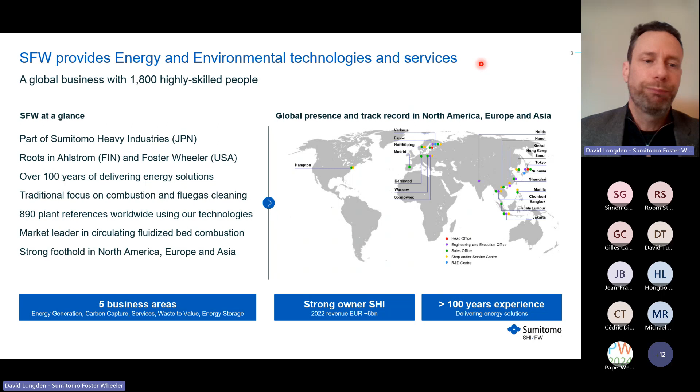So from the 1980s, SFW has a long history going back to this time, where we started essentially with our roots in supplying syngas from air gasification to lime kilns in the paper industry and power applications. We've delivered 11 gasifiers in total, 7 commercial plants, again for the heat and power sector, 2 very important demonstration projects, which I'll talk about, and 2 pilot plants as well.

And you can see the key ones here are with respect to the Sydkraft Biomass IGCC, where we delivered a pressurized gasifier, the Corenso gasifier, where we got experience in using oxygen within the circulating fluidized bed reactor, as well as the NSE biofuels demonstration as well.

So just to say a little bit about the technology, because we understand there's quite a lot of exciting technologies on the market, but we believe that direct oxy-steam circulating fluidized bed gasification technology is one of the most robust. And that really matters to get availability and hours of operation to make this more mainstream.

So our first reference from 1993, our Värnamo gasifier, the air-blown biomass integrated gasification combined cycle plant, built to realise its high net electrical efficiency, and this was successful in proving providing hot gas to a gas turbine. A very successful demonstration project with over 8,500 gasification hours, 3,600 using the gas turbine, tested on a variety of different fuels. And for us, it was most important for SFW to get this experience in pressurized gasification.

Because then we can inform our prospective customers with respect to some of the extra challenges associated with gasification at pressure as opposed to atmospheric. But unfortunately, this plant was mothballed in 2002 simply because it wasn't economically viable with the natural gas price.

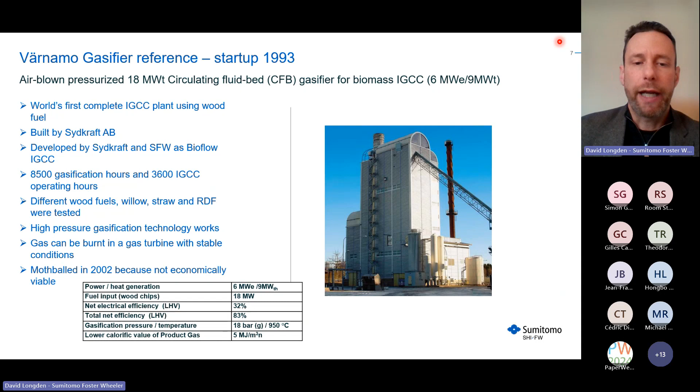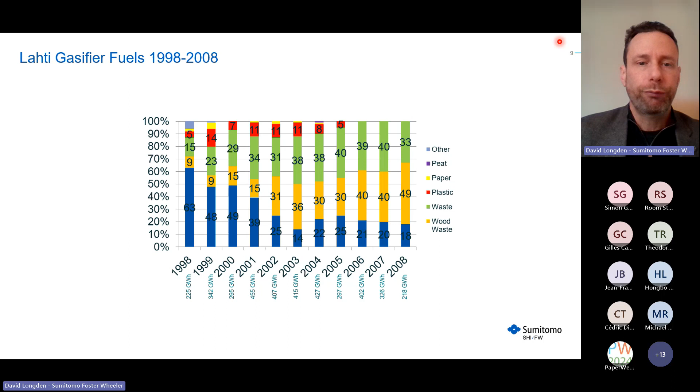Just a snap from the side for the Lahti gasifier. You can see the gasifier here, providing after the cyclone its low calorific value syngas through this duct to a specially designed low CV burner, which is then co-firing this flame. Interestingly, with very little colour in it, you can't see much colour at all, supplementing the other pulverised coal flames, and in this case was displacing up to about 15% of the overall fuel input.

But Lahti doesn't stop there, because in the Lahti Streams EU project that was run by VTT, there was also extensive know-how gained with filtering and reforming at this project as well.

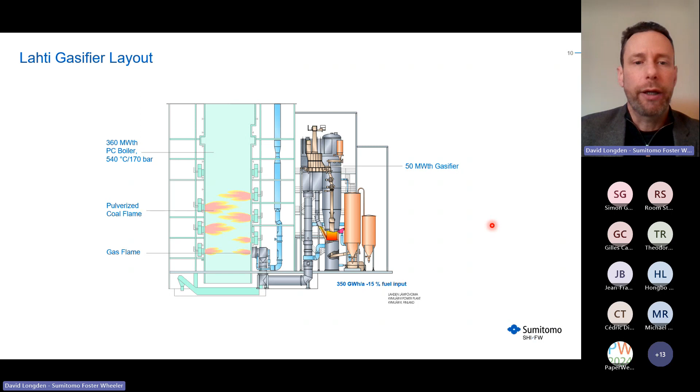So the jewel in the crown, where this all culminated in 2009, so still quite a long time ago, the NSE Biofuels project. This was a consortium of Neste and Stora Enso, I'm sure two companies that you've well heard of. We teamed up with VTT and themselves in order to develop this demonstration plant.

We provided the gasification and the syngas cleaning, whilst VTT provided the reformer know-how with respect to performing the shifts, etc., on the syngas. The ultra gas cleaning was provided by NSE in the form of Rectisol, as well as the smaller 100 kilowatt Fischer-Tropsch synthesis unit.

So just to go through this process, we delivered the scope that is delineated in the blue box. Essentially, we dried the wood chip to 15% moisture, and fed this to the gasifier operating at around 850 degrees.

Then cooled the syngas down to about 500 degrees, and put it through a barrier filter, where the alkali metals could condense, and the dust was taken out from the gas before reforming with the water gas shift and the catalytic converter, using a conventional scrubber to take out the chlorine, sulfur and ammonia to make it suitable for compression before sending it to the synthesis process.

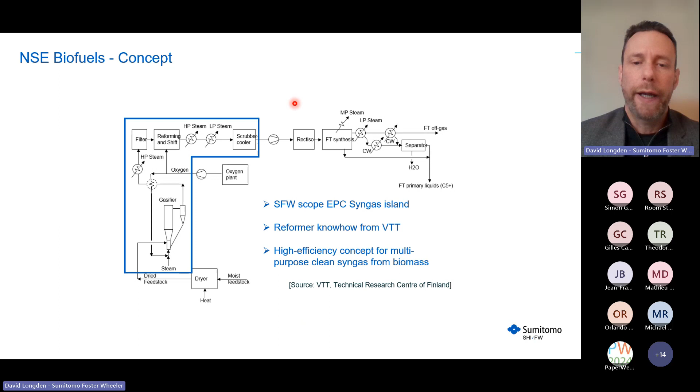Again, looking at the project, the 3D model from afar, we can see the gasifier here. There's the flare on top, feeding system, rotary valve feeders, syngas cooler, hot gas filters, and the reformer before the syngas going off to the ultra clean syngas cooling and the Fischer-Tropsch reactor.

And here's a couple of photographs to the right that gives you some idea of the fuels that we used.

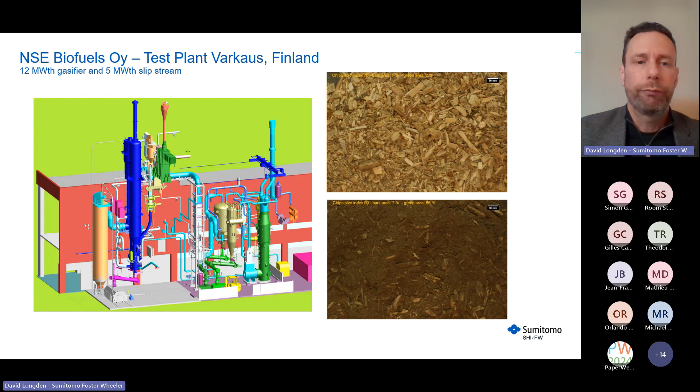So to share with you a little bit of the experience, the gasifier ran for a total of about 9,000 hours, and the 5 megawatt slipstream for the syngas cooling and filtering and reforming for about 5,500. The availability for the gasifier was well over 90% in both the 2 years of the demonstration.

We had some problems with the slipstream syngas cooling and cleaning in the first year, as you can see, but managed to get that availability to over 90% in 2011 in the second year. And I think the most important point about this is that we gave a provenness to the process of the complete cycle from wood-based biomass to the Fischer-Tropsch crude, which was very successfully demonstrated.

So where did this end up back in those days? I guess we culminated in making a design for a commercial plant coming on from the demo at 300 megawatt thermal for the Oxysteam plant.

But sadly, this didn't realise at the time due to its capex, and I think basically there was a lot of preference at the time for HEFA and first generation biofuels, and second generation had probably quite not got the focus on it at that point. And I think quite simply, you know, we were ahead of our time back in 2010.

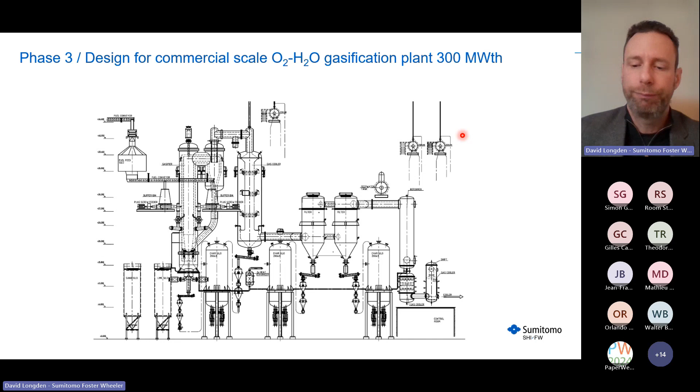So we leave the gasification market and we go then to concentrate on providing CFB combustion plants to Asia. But indeed, there's been a lot of action in other parts of the market.

And the UK was one of them, and I'll use the UK market as an example of where gasification has essentially not got to where it's needed to be or even wanted to be. This was a situation in which the government were offering a significantly high subsidy for gasification. Nobody really understood what gasification meant, I guess, in that sense, but nevertheless, there was a big subsidy for it, in addition to the wholesale power price.

But because there was actually a lobby so that cheaper and lower sophisticated or lower capex technology, they wanted to make sure that they could continue to enjoy this subsidy. So in order to keep everybody engaged and not to upset everybody, at the time it was refused in a 2016 consultation to actually add definitions of syngas cooling and filtering to maximise the maximum value from gasification, because at that time it was widely deemed that no one could actually do it.

But even for these more simplified power generation, almost like I think what they've called close coupled combustion plants, there was still some risk adversity, but a bit of an attitude that don't worry, the EPC contractor will actually wrap it and provide you the warranties and guarantees and liquidate damages behind that. But as we'll see shortly, that did actually just result in losses for the industry there.

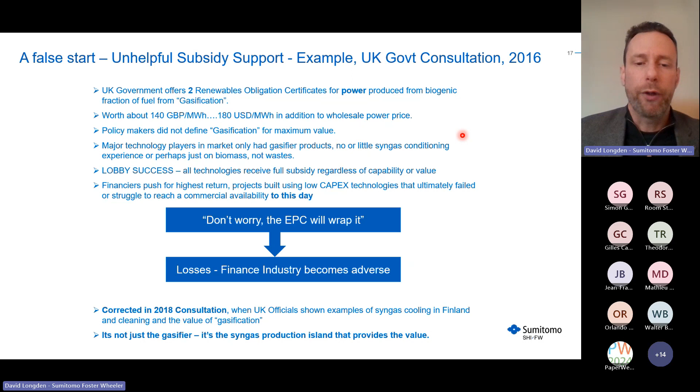This was corrected in 2018, where I took officials from the UK government to go and see what real gasification actually meant, with the cooling and cleaning and the true value of gasification, which is not to burn the gas, but to use its constituents for further processing, either to biofuels or chemicals, and to try and make that view that it's not just the gasifier itself, it's what you're doing with the gas, and therefore how you're making a syngas production island.

Some of the issues that were encountered: feeding systems that were not well designed, particularly if they were meant for biomass and not RDF, blocked bottom ash extraction systems, build-up of tar and dust in ductwork, and agglomerating beds where perhaps it was a BFB.

But there was also a huge amount of project delivery and EPC difficulties, where EPC companies were essentially very dependent on small gasification technology companies that seemed to have a habit of falling into bankruptcy at the time. Even with one project, this one here actually made a £70 million loss just with respect to its liquidated damages.

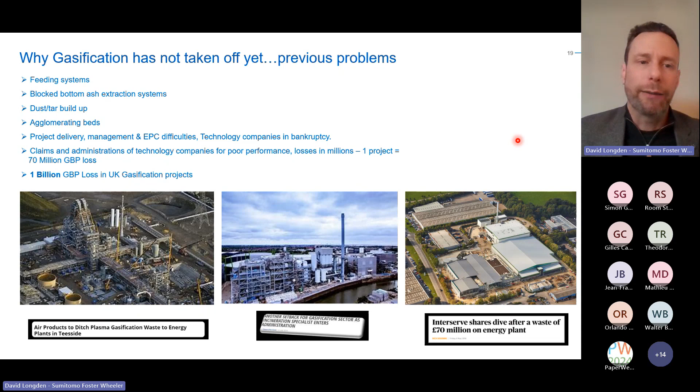But in terms of the whole UK market, a total of £1 billion was lost over these years. However, keeping the positivity, there was a great step forward when the government still acknowledged that gasification could really play its role in achieving net zero and a significant reduction in carbon dioxide emissions.

I wouldn't say it forgave all that, but it certainly was open-minded enough to commission a review from some well-leading consultants at Fichtner that only reviewed gasification using syngas cooling and filtering for biofuel production. Essentially the conclusions on a worldwide basis are that there are several technologies meeting TRL levels of 6 to 8, producing various end products suitable for deployment, and of course these are happening in the world.

So the pandemic comes, a chance for us all to breathe, work from home, get to know how to use Teams, etc. But it was useful in terms of providing that space to breathe perhaps, and for government and policy and decision makers to really understand the true value that gasification could bring.

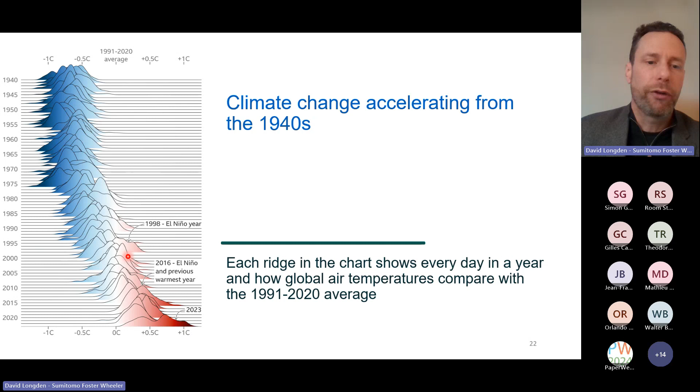And so the question has got to be, well, if value-added gasification isn't going to happen now when we most need it, when is it going to?

Especially when we look at these graphs, when we see that 2023, only just last year, showed some incredible phenomena with respect to increased temperatures, air and sea temperatures, shown in this red band that is above the previous daily records for the year.

And of course, we perhaps got far more perception and understanding of some of the freak weather events that are happening, and of course the heat waves and wildfires that happened across Canada and the US last year, which is of course taking away potential sources of feedstock in itself.

And I think at the moment, even Chile, there's always somewhere in the world that seems to be suffering from greater magnitude and frequencies of environmental disaster.

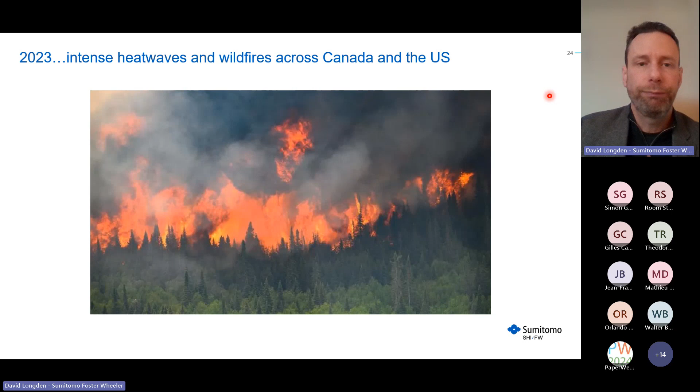But thank goodness the world is responding and has decided that biofuels are to play its part, and of course gasification can also provide a key part of that delivery.

So in the next few slides, I'll focus on the aviation and the maritime sectors with respect to how things are moving forward there.

So we've got increasing regulatory support for sustainable aviation fuel, or SAF. Countries are stepping up, saying that the SAF mandate, 10% of blending, must be done by SAF by 2030, including Canada, the UK and Japan.

You can clearly see that we're starting to leave that power generation behind. We see in the US a very exciting market with the Inflation Reduction Act, supporting SAF production with tax credits, as well as a nice big funding pot of 4.3 billion in order to move SAF projects forward. And of course, we're delighted to be working with our colleagues in Japan and the Japanese government in pushing the technology there, as well as in Europe and the North Americas.

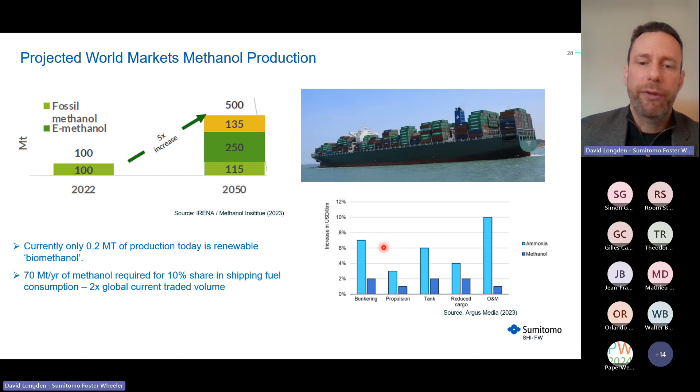But you can see why the shipping industry has preferred methanol over ammonia when you look at how much cheaper methanol is to convert to than ammonia itself, with 9% less O&M costs and 5% less bunkering costs, being able to use that existing infrastructure.

So Maersk is incredibly active across the globe, seemingly signing up MOUs with project developers to take off their methanol from their biorefineries when they build them. Methanol is seen as perceived lower technical and economic risk. It's got more diverse end uses, so it's less vulnerable with respect to its bankability. The oil and gas companies particularly like it because you can use existing fossil fuel infrastructure available for transport and storage, and of course it can be upgraded to SAF or gasoline.

And we're seeing now an increasing number of ships being ordered, 35 ships ordered just in 2022, but we expect the number of ships to keep increasing up to 2028 and beyond.

So policy and now regulation, looking just for an example from the EU for a moment, we've got the RefuelEU initiatives for aviation and shipping, where essentially emissions are being cut to 55% of the average from 2020 by 2030. We can see how aircraft fuel suppliers are obliged to increase their blend, really significantly from the low value of, say, around 2% today, all the way to 70% up to 2050.

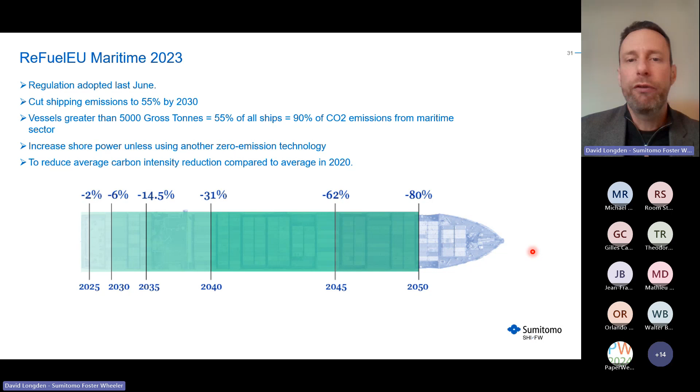So the point is that these regulations are now providing a level playing field, which was absent back in 2016, I think worldwide, but certainly in the context of the UK market, which we discussed before, which led to a huge amount of chaos and confusion and that billion pound loss in that sense.

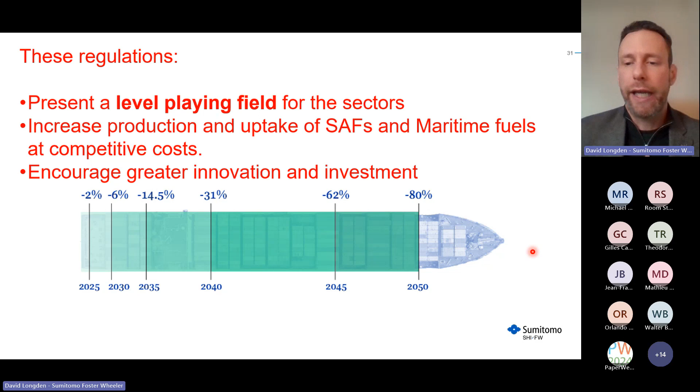So this is great news for the industry. It's going to encourage production and the uptake of fuels and drive competitiveness, as well as encouraging the innovation and the investment to do that. And here at SFW, this is clearly where we are placing our efforts.

So let's celebrate some of these achievements that have been happening from 2020. We saw in June 2021 the JAL flight, Japan Airlines, fly from Tokyo to Sapporo using a SAF blend, 50% at that time, using SAF from the Fischer-Tropsch synthesis technology at the Nagoya Gasification plant, using woody biomass.

Enerkem has been leading the way and has never really detracted from the focus on biofuels, progressing very well from their Westbury demonstration plant to the Edmonton plant. We saw only just last week that at 15,000 hours of operation they're going to retire that plant now, but they got the certification for converting waste to biomethanol and indeed to bioethanol as well.

And I think what I'm particularly excited about is Enerkem's project to be coupled with a 90 megawatt proton exchange membrane electrolyzer, for reasons we'll discuss later, near you guys, just in Varennes. I'm very sad not to be with you closer to home there.

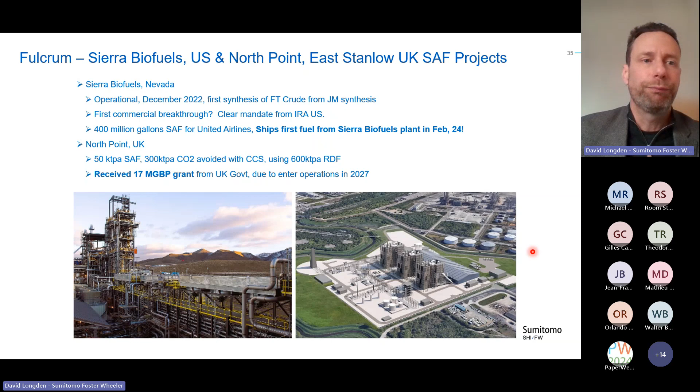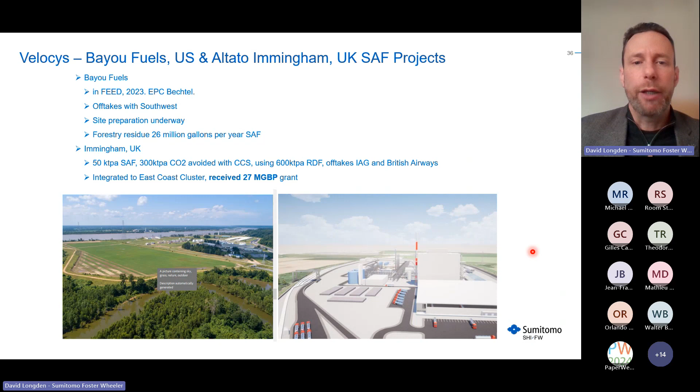Velocys, another well-known synthesis company for quite some time now, is in FEED, fully supported by their EPC partner Bechtel, with offtake from Southwest Airlines, preparing their site. In Immingham, UK, in the industrial heartlands of our northeast, they're also preparing a biorefinery based on refuse-derived fuel, supported by British Airways. This is also to be integrated into our East Coast cluster of carbon capture, where you can sequester the CO2 under the sea, and they have received a £27 million grant into the project.

Just in November 2023, it doesn't seem that Christmas was that long ago, Virgin Atlantic was successful in flying the world's first 100% SAF commercial flight from London Heathrow to New York. Wow, it is actually believable - we can fly in a sustainable way and not feel guilty about it. This was around 88% SAF from HEFA and 12% from synthetic kerosene. Nevertheless, it shows that in order to make this happen, we need to use all the different technologies that can work on all the different feedstocks.

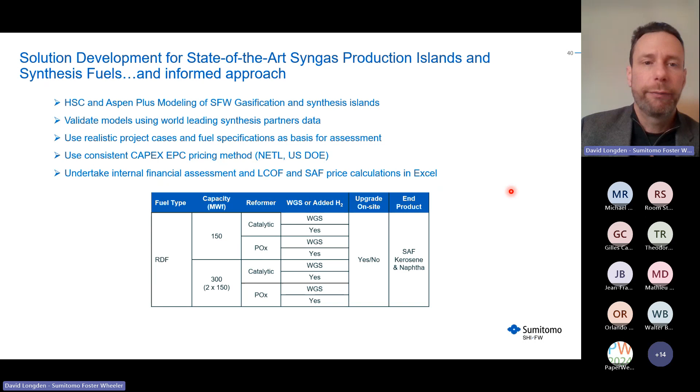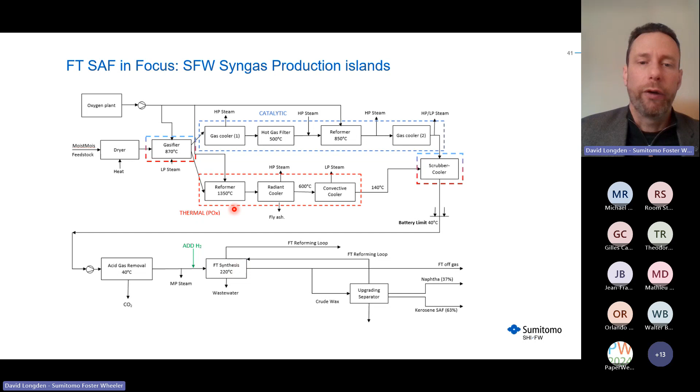Here's the PFDs to show it. The catalytic process is very much as what we successfully demonstrated at the NSE Biofuels demonstration project. And here we have the thermal partial oxidation reforming route, where essentially the reformer itself operates at over 1,300 degrees with an auxiliary fuel and oxygen. The oxygen required for that is around 25% of what would be required for the whole biorefinery, but the auxiliary fuel would most preferably come from tail gas from the synthesis unit, or indeed natural gas.

Looking more at the reformers we've been considering: the catalytic reformer uses zirconium and nickel-based catalysts and uses the injection of steam and oxygen to produce its resultant syngas, whilst the POX reactor is much more sensitive to particle load distribution, requiring adequate mixing of the syngas with the hot oxygen burner flame. The catalytic reformer gets more water gas shift, resulting in around 16% more hydrogen in the syngas compared to the POX. But the POX is very good at reforming methane, which increases the carbon monoxide amount in the gas. So in the absence of any supplementary hydrogen, the catalytic reformer has advantages over the POX, but the POX might have advantage over the catalytic where other forms of hydrogen were available.

But of course, this is not the full story, as we'll see later.

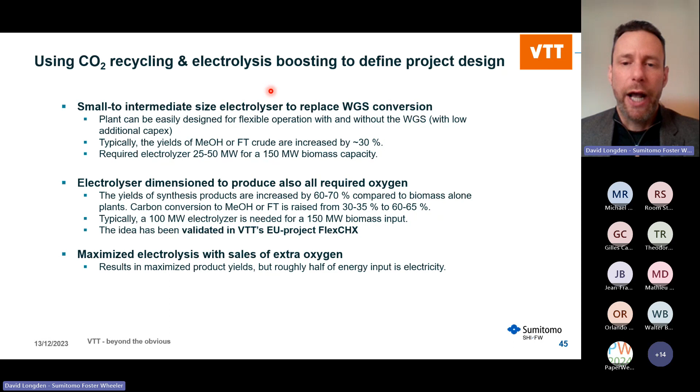It's almost on the point of these plants becoming e-fuel plants at this point, where roughly half of the amount of energy input is actually coming from electricity.

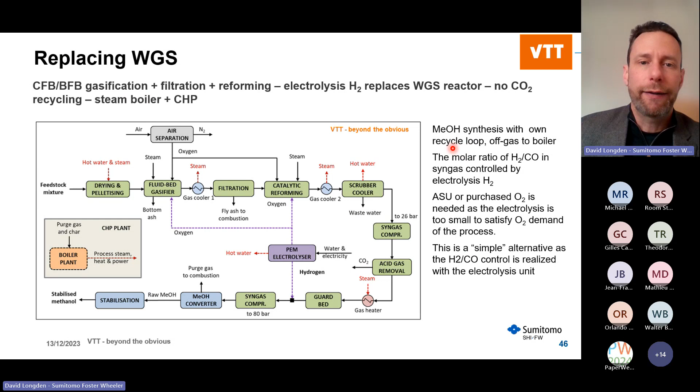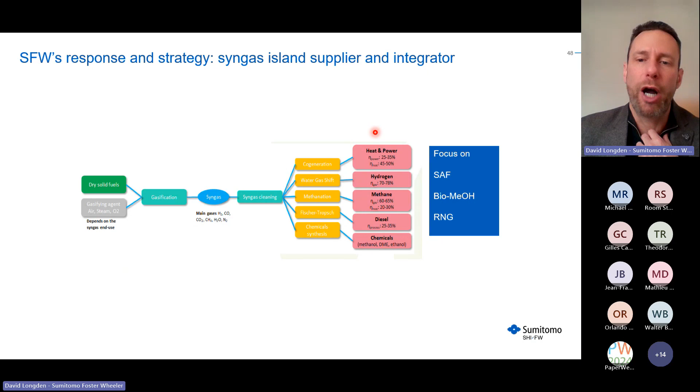So in terms of how we're responding to all this, this is a typical gasification to biofuel pathway. We will focus at SFW on SAF, biomethanol and RNG. We are a provider of syngas islands and the integrator of the components within that island, working very closely with third-party technologies for the reforming in order to get the best syngas compositions we can.

Pre-treatment is something which we'd leave to others. There are some very good companies out there that do the necessary pre-processing preparation for fluidized bed technology. BMH, for example, is a company that has provided their technology in front of many fluidized beds in Finland with our combustion plants, and they are also providing to Enerkem for the Varennes plant.

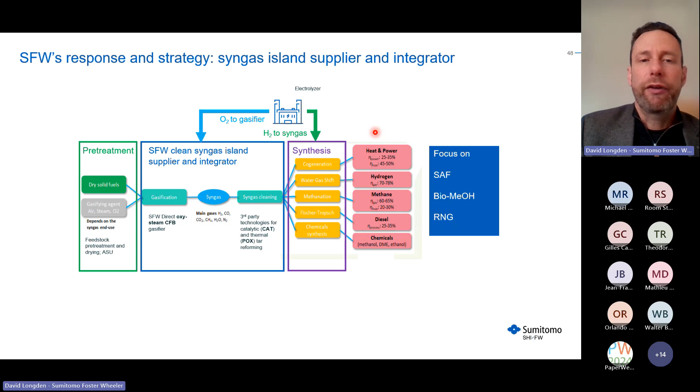Synthesis, of course, we work with our partners on, as discussed earlier. We're certainly very serious about integrating electrolyzers with our offering, as well as this CO2 recycling. But essentially it will still be down to EPC contractors to provide the full scope of the plant to owners and financiers, etc., with the warranties and guarantees behind that.

So, in the final part of my presentation to you today, where are we now and heading to?

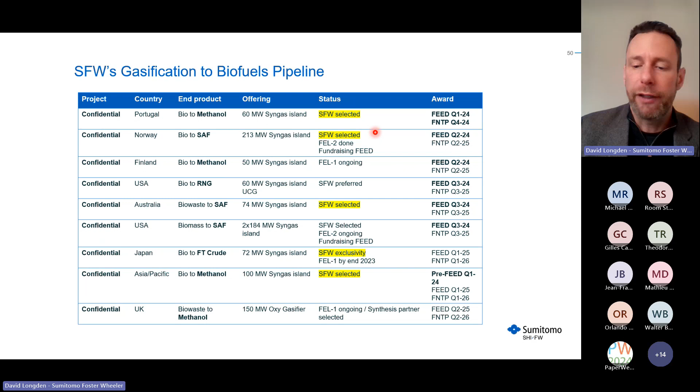So our present focus is bankability. People are asking us very serious questions with respect to the track record needed to give others comfort in order to finance these and really make these projects happen. With respect to that, we focus on our expertise to guarantee syngas composition, availability and reliability of plant and technology, in the scope I explained before.

For items outside our scope, we collaborate with our technology partners to manage the technology risk. There's the question of what first-of-a-kind guarantees actually mean, as well as EPCM or an EPC route - what is the best way of making these happen? It does depend on who the end project owner would be and their own degree of in-house expertise. We realize we need to work at scale to get the economics required for sensible business cases, to enable the sector to move beyond venture capital to more conventional project finance sources of capital.

So concluding, why is the time now? I really do believe we've got a level of awareness of climate change never seen before. Also the need for energy security - the amount of conflict going on in the world has never been at such a level since World War II, which is playing its part, with governments providing the policies to create a level playing field for value-added gasification for synthesis fuels production, for those difficult-to-decarbonise industries such as maritime and aviation, which so desperately need that.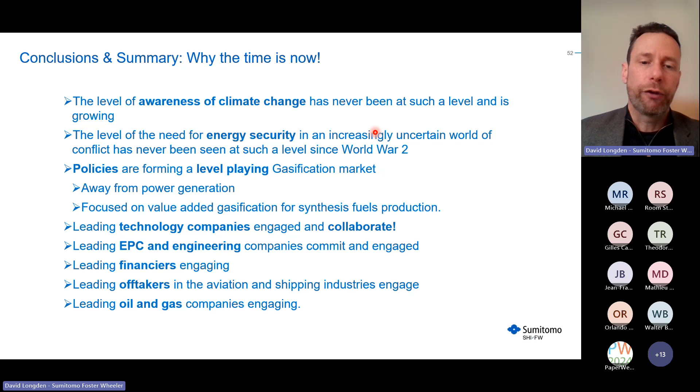And of course we're seeing the oil and gas companies, the fossil fuel companies, really engaging with us - it's great to see them with their ideas of how to use existing infrastructure to play their part in making this happen. Everyone is focusing to make this happen now. And finally, I was just wondering, do you feel that now is the time?

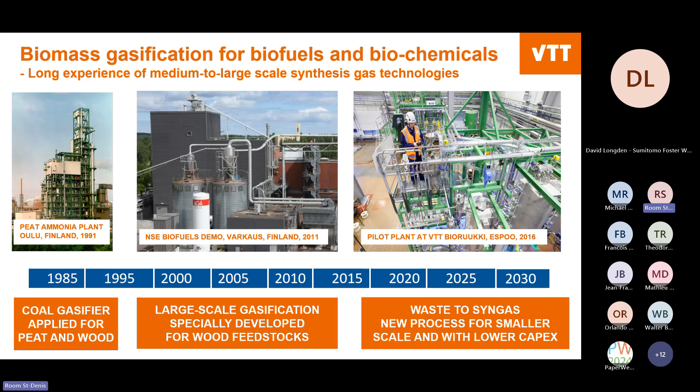So what we have mainly focused on is this type of process where we have this robust CFB or BFB, fluidized bed gasifier, steam and oxygen blown. It's quite simple from structure and really robust for what comes to feedstock basis. After the gasification, there is a lot of solids still, even though the carbon conversion in the process is really high, 98% or even higher. But of course there is then ashes and bed materials.

So the filtration is then the second step. We get all the particulates out from the gas, which then eases out the processing of the gas afterwards. Then we get like heavy metals, alkali metals, most part of chlorine already taken out at the filtration step.

Then the reforming technology is really like the key of these innovations. There the tars or the heavier hydrocarbons which are present in the gas are then decomposed, and then the yield for the synthesis gas is maximized. And what was already shown in David's presentation, the hydrogen to CO ratio is quite favorable already after the reformer, and we can already adjust the ratio in that step, which gives a benefit over some other technologies. But still, the gas is not clean enough for utilizing at the Fischer-Tropsch or methanol synthesis.

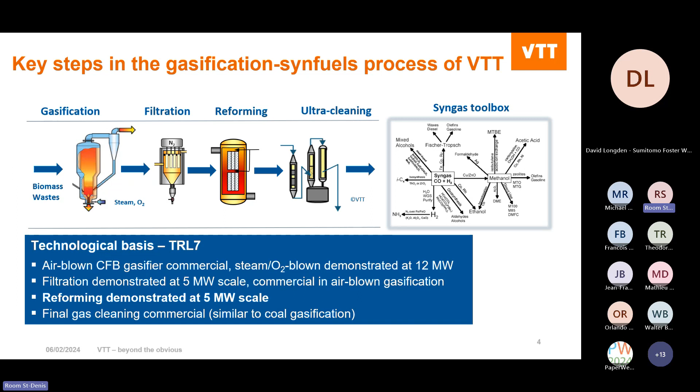About the reformer technology - it's quite simple in that sense that we have catalyst beds where we insert some oxygen to raise the temperature and bring energy for the reactions. We have active catalysts there, mainly the choices are zirconium, noble metal, or nickel-based catalyst. Nickel-based catalysts are now favored because of their reasonable price tag, and they are commercially available from many suppliers.

This technology has been developed at our own pilots for several thousands of hours, and then it has been demonstrated at that NSE Biofuels demonstration.

How we then cooperate - we are a non-profit research institute, so we are licensing the technology. We are not delivering anything. We cooperate with technology companies, for example Sumitomo Foster Wheeler, but that's the way how we are in that game. We are not here to deliver anything.

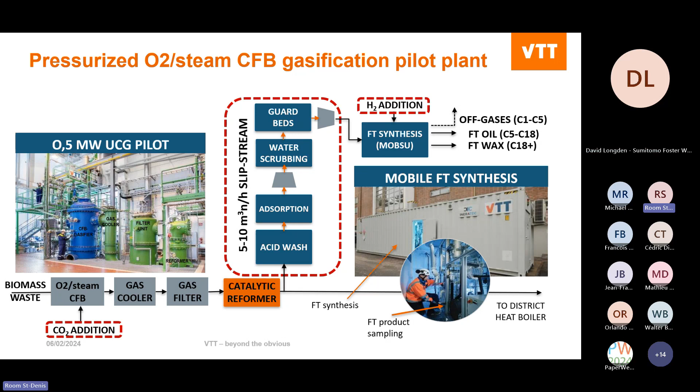We have the whole chain. We also have the synthesis there, Fischer-Tropsch synthesis, where we can produce batches of Fischer-Tropsch products for further studies, doing also showcases, because sometimes you have to convince some not-so-technical persons. For engineers, this is something everything we can do, but for someone it might be more about seeing that there is really that product which they are looking for.

The NSE Biofuels project was so nicely presented already by David, but we were involved in that as a research partner, and that's our role also. We develop the technologies to that TRL5 level so we can pilot them at our environment, but then we support the industry to successfully bring these technologies into real commercial scale.

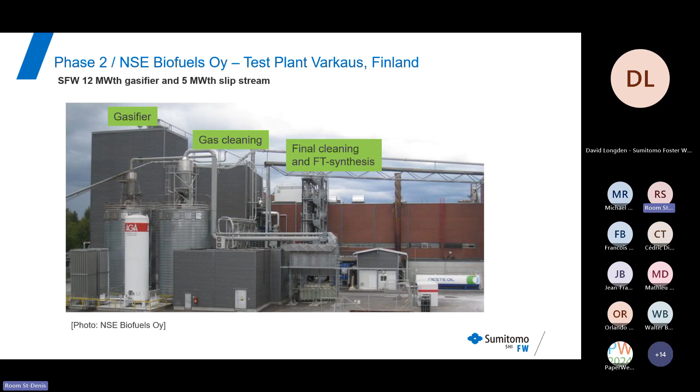It's worth remembering that this was already some years back, this demonstration, but it showed that steam and oxygen blown gasification for biomasses has been proven - 9,000 hours of operation, smooth operation. It can be discussed in more detail with Sumitomo. Also the slipstream with filtering, with reforming, that's also something which is proven. And it's quite costly to make these kinds of demonstrations, so it's not wise to start doing the same thing now 10 years later, but to build on this.

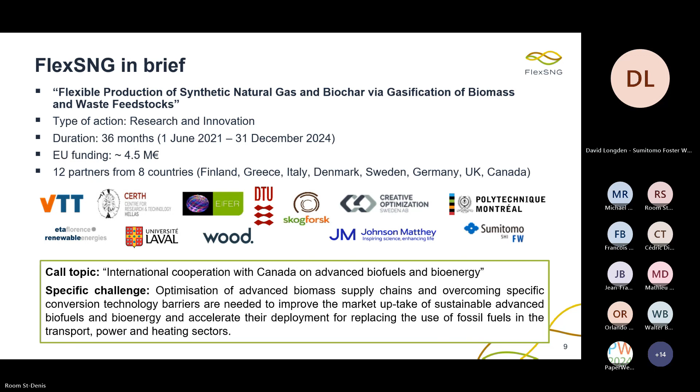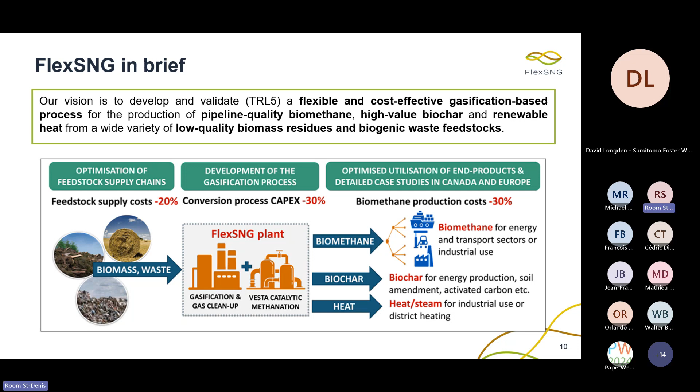So what we are then developing - basically we focus on getting the CapEx lower from the process. We optimize the feedstock supply chain, and we decrease the production cost of biomethane by these means. And basically how it is done - this is like a typical setup of gasification to methane production.

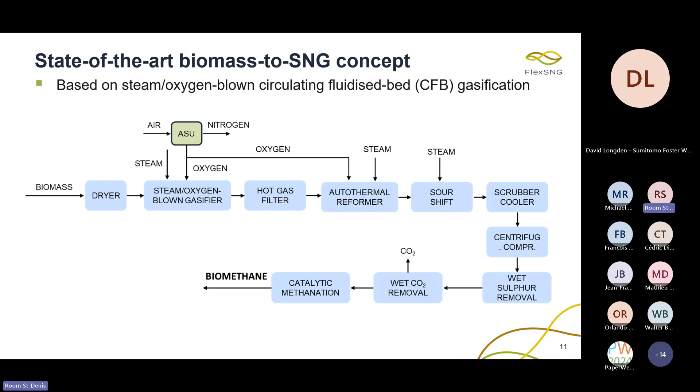One innovation we are bringing in is how to produce the oxygen, not through air separation units, but with oxygen membrane technology, which is estimated to bring about -10% of the capex. It's pretty capex intensive, the oxygen production.

Then we can eliminate the water gas shift. There are two things - the reformer is something where we can adjust it already, and then the Wood methanation technology we have is really more flexible than the competitors.

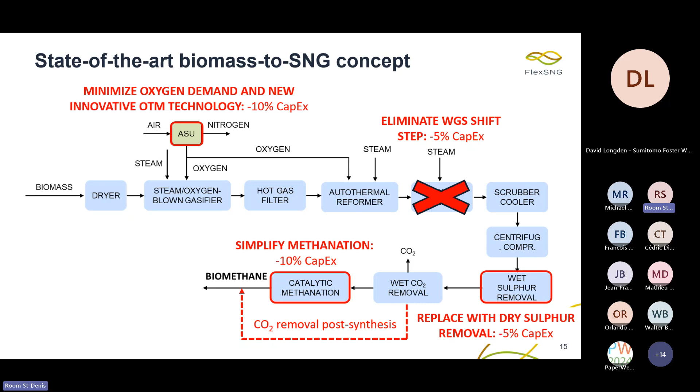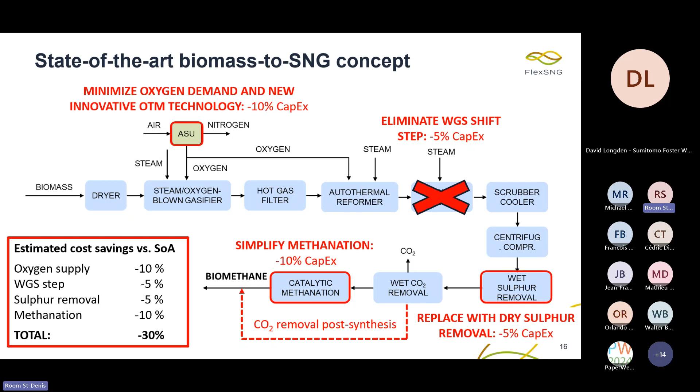We replaced basically the rectisol technology with dry sulfur removal based on zinc or activated carbon processes, and then the Wood methanation, which Wood has in their portfolio, is a simpler and really efficient process, which also makes it possible to remove CO2 after the synthesis. So we gain quite much benefit from that, and that brings it to about a 30% capex decrease, where we focus. We have then made tests for that.

Another thing we have is these two operational modes. In this project, we are focusing not only to maximize the yield of SNG, but also to produce biochar, and that's really the research focus in this project. We're looking at how to utilize fluidized gasification in such a way that we can also produce biochar in certain circumstances, if it seems feasible. It can then be a carbon sink, or it can be used in construction, so it could bring some benefits in the future.

It's basically done so that the process itself is the same, the gasifier itself is the same, but we just run it a bit differently, so that we get a lower carbon efficiency, or in a way carbon conversion in the gasifier, and then we recover the biochar which is produced.

Or then what is the typical case nowadays, to maximize the production of the synthetic natural gas or RNG, where we target a 70% conversion on energy basis. I think we are now quite near to that target, but it will be calculated and estimated more carefully.

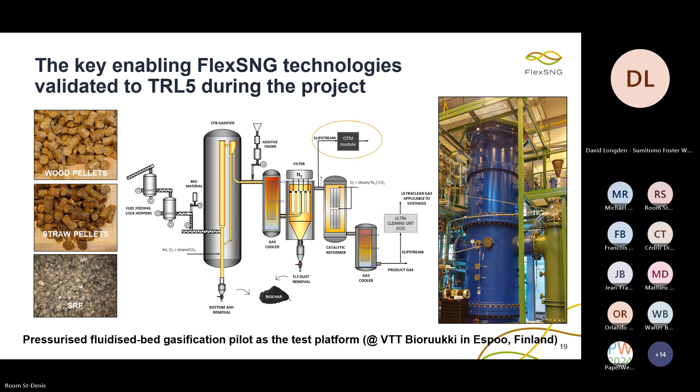We have quite extensive infrastructure at VTT, so basically we are utilizing this for this project, but also for many other projects. That's how we can help industry, being really effective, because we already have the infrastructure. We can be an outsourced research partner who does the tests, and you get the results really fast. You don't need to invest in your own infrastructure.

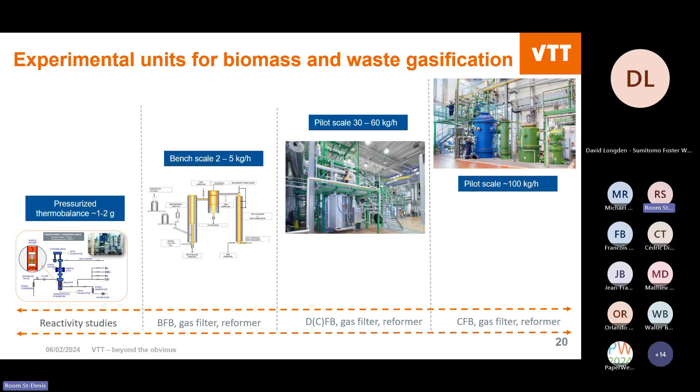I think they sort of have a religion of not going beyond TRL 5 or 6 or somewhere around that, and then working closely and seeing the commercial implications, one technology at a time. It's really impressive, two of the VTT facilities just outside Helsinki.

Checking for questions online. Yeah, I think we might have a question here. Please, I don't want to be the only one asking questions. A very simple one: does your process allow you to separate the ash from the char, or does it come together?

Well, basically part of the ash comes together with the biomass from the gasifier. In the bottom of the gasifier, we collect really a minor part of the char. So basically we get part there, but of course quite much of the ash is actually bound into this biochar, and that restricts where it can be used. And VTT has actually done a great job researching that topic. Good question, thanks.

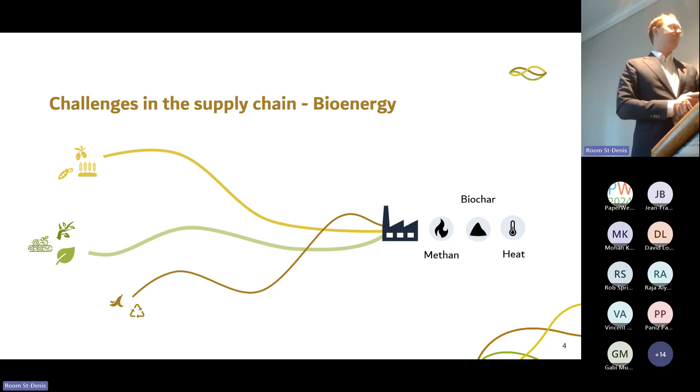Looking at the challenges in the supply chain, we have these three streams. What we really want to do is produce either biomethane, biochar, or heat. So we have three value chains and three products that we can co-produce. Looking at the challenges, it's quite different across the value chain overall.

For agriculture, we have seasonal availability — a very limited window where we can actually harvest agri-waste. We have variation in properties since we have quite a lot of different types of agri-waste in the system. We also have different modes of transportation, price efficiency, and of course a very important factor: the moisture level.

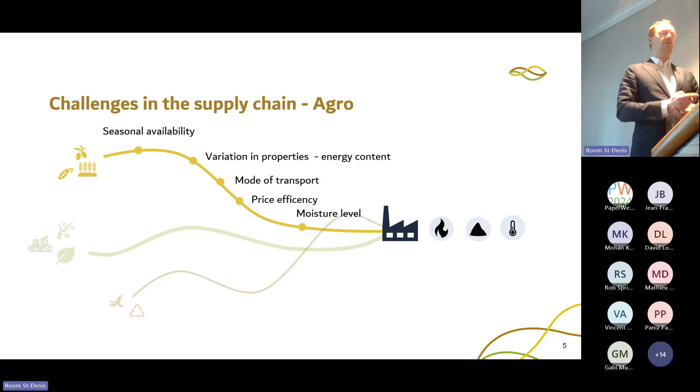For the forest residue part, we have the question of when do we process? Now we have the challenge that we have forest residues, but we need to break that into chips. So where do we do it? At the harvesting site, at a terminal, or at the end product facility? We also have to take into account transporting either the chips or the forest residue, and we have different transportation modes to consider.

Of course, we have different quality here because we have different kinds of trees. There's also the aspect of resource allocation, since equipment needs to move around, and we have different capacity limitations for actually doing the chipping to get the right feedstock for the process. Same as agriculture, we have a price-efficient range where we're cost effective with the feedstock. And then there's inventory utilization, because we're very intensive during perhaps winter and summer when we can harvest a lot, but it's more difficult transitioning from one season to another, with equipment limitations going into the forestry sites producing this logging residue.

Then we have municipal solid waste — it's the same question here: when do we process it? Do we process it at bioeconomy or biomass centers, or at larger terminals, or at the end product facility? Where do we actually gather that, and what is the availability?

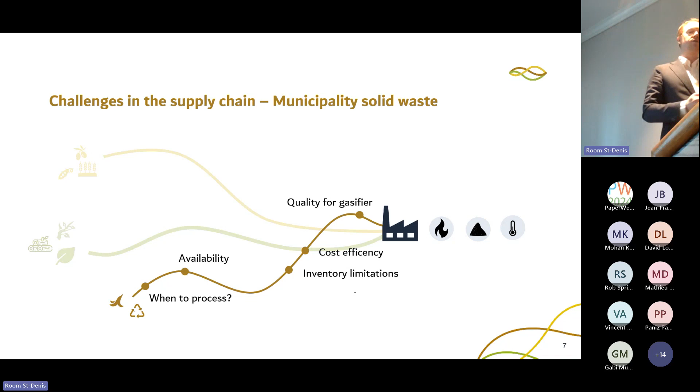Another challenge in this value chain is the supply chain: we have to decide what to produce, handling different campaigns and seeing what kind of recipe we want to use. Now that we can co-handle different feedstock, we can use different properties, combining forest residue with agricultural waste, which means we need to define what recipes to use and when.

There's also the question of capacity - how much we can have, how much inventory, how much we can gather, and utilizing this resource over time, as well as the drying process. What soil moisture content do we want? Do we want a process to dry it, or keep it drier from the start with more inventory over time? And of course, the yield of the feedstock, the seasonal variation, and the price, cost and competitiveness, because we have to stay competitive in gathering this supply chain and feedstock to provide that efficiency.

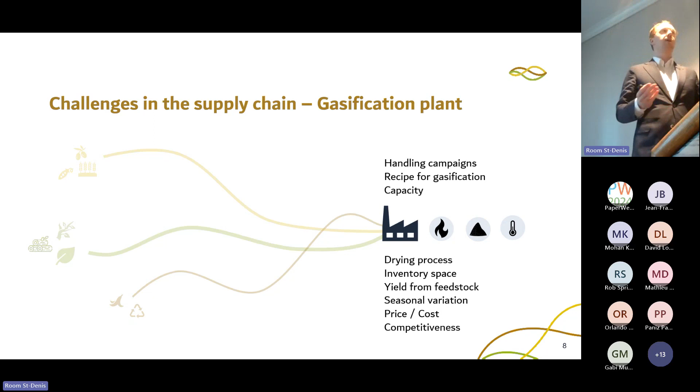In the FlexSNG project, which is quite unique, we developed a process to follow quality and soil moisture levels over time. We can look at different soil moisture levels for the feedstock over time - when do we want to go pick it up, what process do we associate with dropping that soil moisture level, and also take into account the inventory - where do we want to store it?

Another part is looking at transportation modes, the processes and feedstock handling - where do we want to ship, and what transportation mode do we want to use, truck or train? We can combine this within the optimization model as well.

Another part is looking at the campaigns - how do we want to produce, taking into account feedstock price, feedstock soil moisture, and the inventory cost of these different materials. Agriculture waste has a small window, but forest residue has a large window, so do we want to store forest residue while gathering agriculture, or store agriculture for when forest residue becomes more expensive during fall or winter? Co-handling capacity in this joint value chain has also been key in the FlexSNG project.

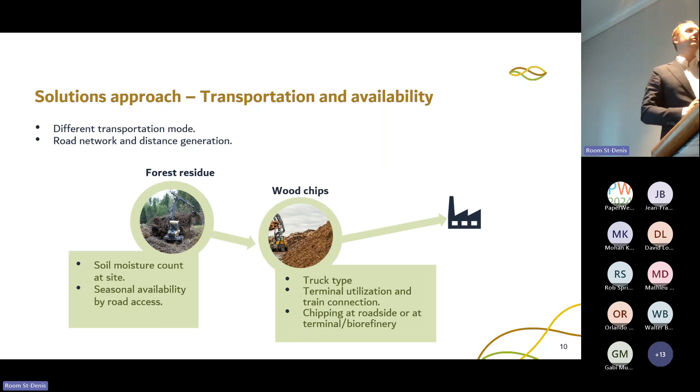To address this challenge with trucking and train, we included a way of dynamically creating the road network for all the case studies, whether in Sweden, Canada, Crete in Greece, or even New Zealand. This lets us utilize the real transportation costs and real distances for traveling by truck.

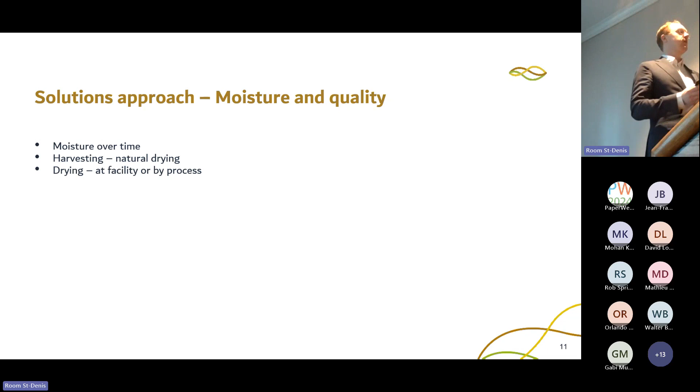As I mentioned, there's the moisture and quality over time to consider. If you have a pile lying by the road, it would have a different soil moisture count by the season, as well as another moisture count once you've done the harvesting, and drying to reduce soil moisture for the upcoming period and production.

So what we've done is made a methodology. This is for a monthly period, but we can also have it on a daily or weekly level. We can see the soil moisture count if we would leave it in roadside storage, so now we have availability to see the soil moisture if it's lying there, and it's been lying there for quite a while.

And of course, what we included as well is the way of doing a drying process, where we can do drying either at a terminal or at the production facility.

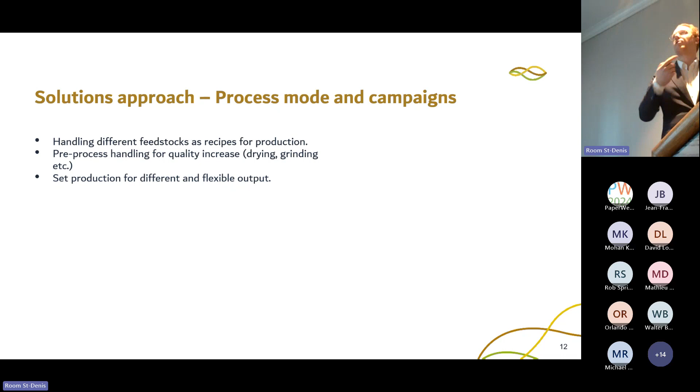Looking at the process mode and campaigns, that's how we handle different feedstocks with the recipes, looking at the production. It's also about the pre-process handling, like the quality increase I mentioned before, drying, grinding, etc., and also being able to produce this flexible output that Ilkka nicely explained, mode 1 and mode 2. What do we want to produce and what kind of recipe do we want to utilize?

So looking at that, in the model we can take this into account. We can take the pre-treatment and the production, but now have different kinds of recipes. These are examples, there are many more and percentages within this, but we can have forest, forest agri, or forest agri and wood waste, depending on the production and what you want to use as a recipe for the quality, ash content, etc.

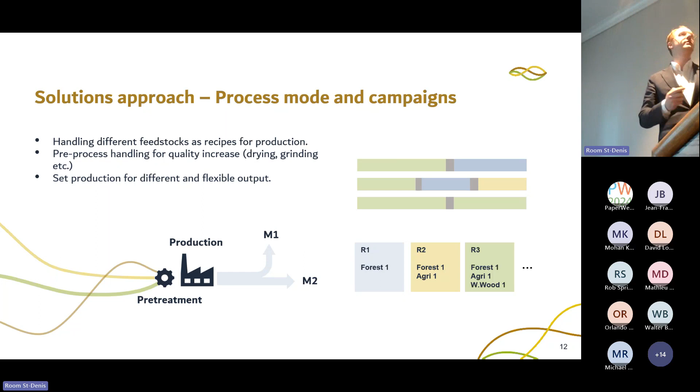What we can really do with the model is create these campaigns: when should you use what material, associated with what you want to produce. And also looking at what would be the transportation cost for your product, what would be the inventory cost of keeping the product. So we can make examples and do scenarios depending on what is the most valued attribute and what brings the most value.

Now that we have that complete model of the value chain, we can look at the scenario analysis part of it. What kind of location do we want? What is the feedstock availability in the nearby neighborhood? What kind of transportation mode do we have access to? And what kind of processing and pre-treatment facilities are available? Of course, competitiveness becomes a big important part of this.

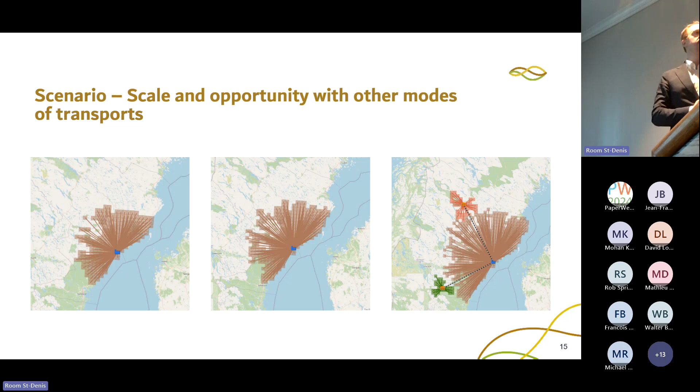The last one is sort of the competitive advantage, and that's when looking at a picture like this. Yeah, this is very good, very nice. It's by itself, it has a lot of availability, but the reality is that we have competitors as well. Other people want to buy this product, so we have to take that into account.

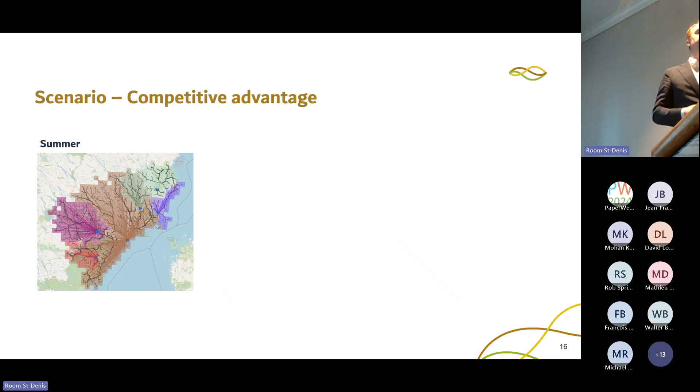So we can create scenarios looking at, well, during a low season, this could be the potential where we can actually be profitable because the other competitors, which is the bioenergy plant creating heat, are not very interested in the product during summer. But as that increases during winter, we can see that they're paying much more than us for the winter period. That means we have to go further, making it perhaps less profitable.

So we can make an analysis on that, looking at whether utilizing train with the same kind of volume could make us more profitable because we can compare it to the competitors in the surrounding area. We don't have to compete with them in close proximity in this kind of area.

So to summarize, what we've done in the FlexSNG project is develop a tool that can really evaluate the different aspects of the supply chain, looking at the key aspects of having that flexible and integrated value chain and investing in big biomass projects.

We can also include the aspects of looking at the end-to-end value chain and feedstock to deliver the product, because we can have the pricing and the availability and size of the feedstock. And we can also co-handle these different kinds of feedstocks as well, including quality and moisture level of the feedstock.

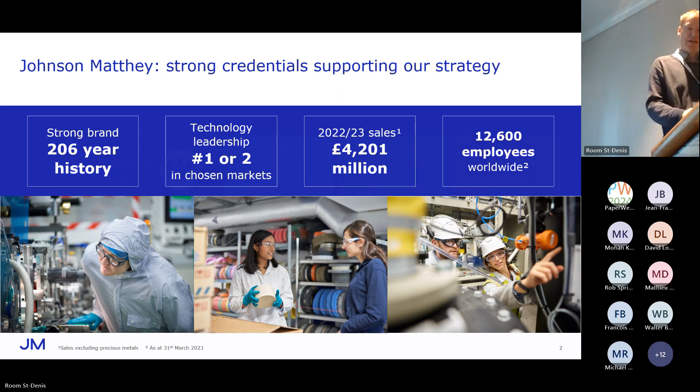If I go into a bit more detail, we have got 4 main areas. We're business to business generally, so you may not have heard of all our technology, but if you own a car, we invented the technology for the catalytic converter. So 1 in 3 cars contains our technology. And we also do a lot of work on particle filters for heavy duty diesels, big trucks, emission controls for static things. The area I'm going to talk most about today is our catalyst technologies.

This is to do with the syngas, which I'll tell you more about, but things like edible oils, hydrogen generation, ammonia, methanol, these type of areas. Our third pillar is hydrogen technologies. We've been doing fuel cells for a long time in the UK. And more recently, based on that, we've started doing electrolyzer technology, which is almost the reverse of fuel cells. And we see that as a huge future area.

Underpinning all this is our precious metals - metals like platinum, iridium, palladium. We're one of the largest refiners of these, and the technology that goes into most of these technologies. So we work a lot with our customers and partners, and we share the technology capabilities.

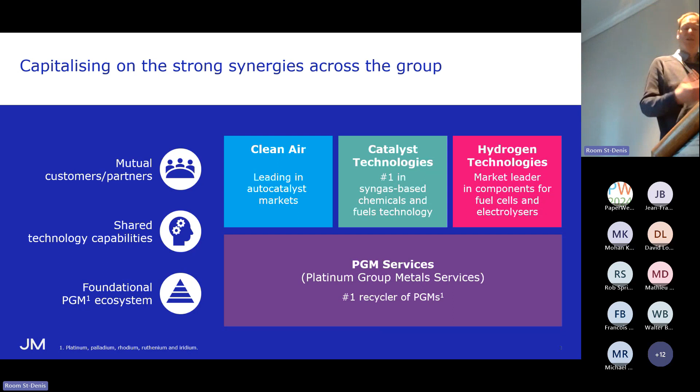As we heard earlier on today, and we're all aware of, the climate is changing, and all of us are affected by that. There's a lot of resource scarcity and also energy insecurity. So our number 1 priority is to lead the transition to net zero and to protect the people and planet. I won't dwell too much on that, but it's a very important message, and I think we all appreciate that.

And how we're going to do this is we're a global leader in sustainable technologies, and we work with a lot of the main energy companies, chemical companies, and automotive companies, and they depend on us to help provide catalysts and processes to help them decarbonize the system, to reduce the harmful emissions and ultimately achieve their sustainability goals.

So the chemical industry is very carbon intensive, and 96% of all the manufactured products rely on chemicals. This is foods, dyes, all the things around us require chemicals. And this demand is expected to grow by 25% by 2030. So we've got to do some more to do this. Ultimately, the chemical industry is one of the biggest producers of carbon dioxide, which is bad for the environment. And approximately 18% of the emissions come from this sector. So we're doing our bit to reduce these down.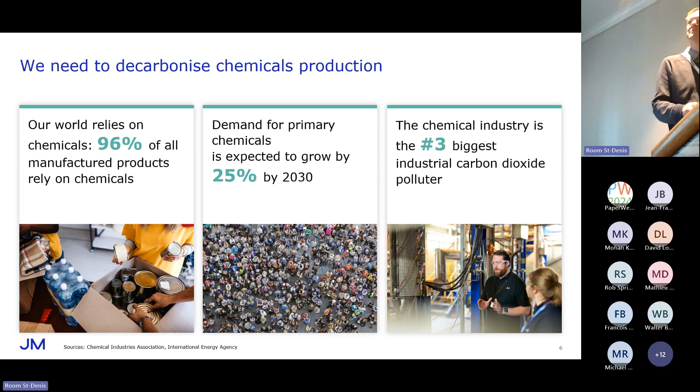So where is that going to come from? If we assume that we're going to reduce our dependency on fossil fuels, as everybody hoped, there's a maximum of 20% that really can come from bio-based. There's a limit to how much you can harvest biomass. And also, some of it gets used for food.

So that's obviously not going to be acceptable. So the limit is about 20%. So this then gives us - what do we do?

25% is predicted to come from carbon dioxide, and that's direct air capture or using CO2 from waste streams, industrial processes, and then you can capture that. But obviously for hydrocarbons, you need carbon and hydrogen. So to use that CO2, we need to get some hydrogen.

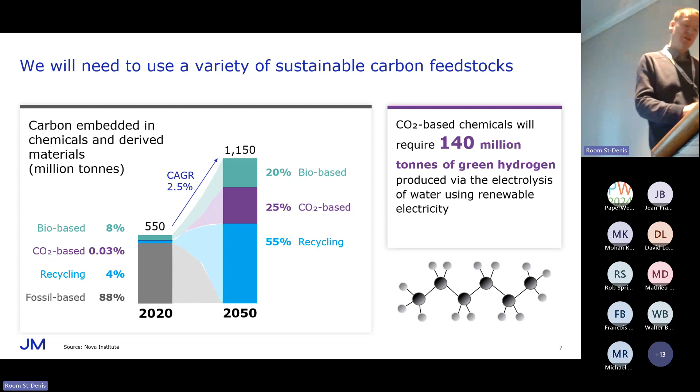So the next two slides are going to talk about syngas, which is the main focus of this talk.

Currently, fossil fuels are the main source of this. Traditionally, you can take things like coal, natural gas, oil - things we're all familiar with - and put them through a process. Generally, steam reforming is the main process where we convert them. That's energy intensive, and it produces hydrogen, a mixture of hydrogen, carbon dioxide, and carbon monoxide, which then can be used to produce all these value-added chemicals, which are so critical for our lifestyles.

A lot of these are industrial and consumer applications. So we've got paints, polymers, woods, fertilizers, and then we've got transport fuels. These are sort of the traditional transport fuels - they're not going through a syngas route. This is just purely fuels for cars, trains, buses, and planes.

So if we step forward, this is what the future could look like. We become less heavily dependent on fossil fuels, coals and natural gas, and we become reliant on more sustainable feedstocks. We've talked a lot today about biomass, wastes. We're also adding into this capturing the CO2 and then renewable energy.

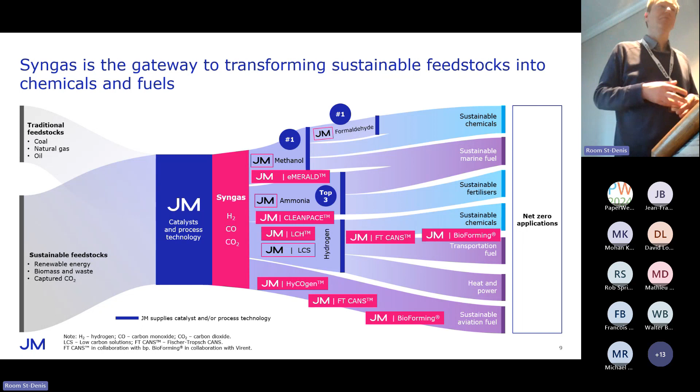And if we use Johnson Matthey's technology and expertise in engineering and flow sheet coupled with syngas, then we can go through to many of these processes. I'm going to tell you about some of these processes today, but they've all handily got names.

To get through to sustainable aviation fuel, we can use the process of HyCOgen and FT CANS. And also we've got another process there called eMERALD, which brings us through to methanol. I'll tell you a bit more about these processes in a minute.

Obviously, it's not the whole process because you can also produce things by non-syngas routes. So an example is the bioforming process - earlier on we heard about the plane that went across the Atlantic, the Virgin Atlantic flight. That was made by a non-thermochemical route.

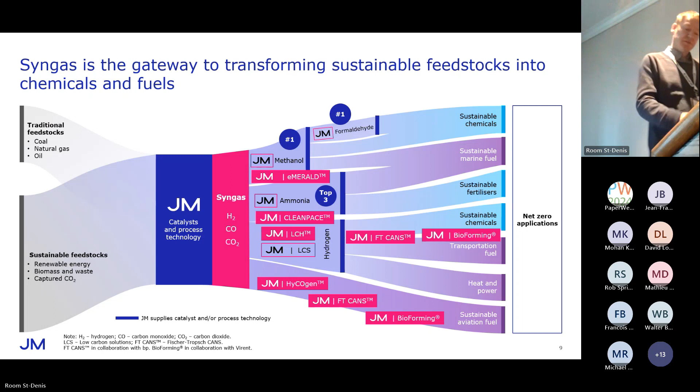So as I mentioned, Johnson Matthey is a catalyst company, which I'm involved in, and we're also an engineering company. So by putting these two things together, we can help our customers optimize their processes.

So as I promised, some of the details here. Currently, a lot of these processes involve the water gas shift reaction - this is an equilibrium reaction. If you look on the right-hand side of the equation, if you put water and carbon monoxide there, you can create carbon dioxide.

Normally you want to produce more hydrogen and carbon monoxide, so by tailoring these ratios, you can optimize what you want. In this case, we are taking captured CO2 and adding hydrogen to it, and that is producing more carbon monoxide. With that, you can tailor the ratio of CO to hydrogen, which is what you need to tailor your Fischer-Tropsch reaction to get the right proportion of the right chain length of carbons.

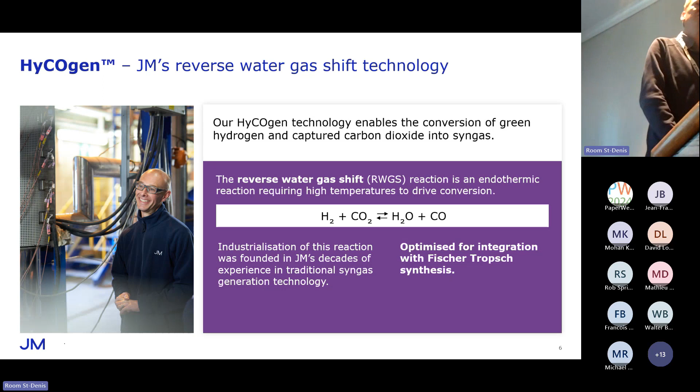So the water gas shift reaction is quite easy. The reverse water gas shift is much harder, and it must be done at a very high temperature, and there are lots of challenges with that. But over the years, Johnson Matthey's been involved in lots of these engineering solutions, and we've now got a process which does that. To give you an example, this process has to happen at maybe 1200 degrees.

And then in the reactor, you're going to have a lot of reactions with the stainless steel tube. You get corrosion, you get metal dusting, and you're adding oxygen in there. So there's a lot of problems in the process, and it's very challenging for the catalyst, but we've now got a system for that.

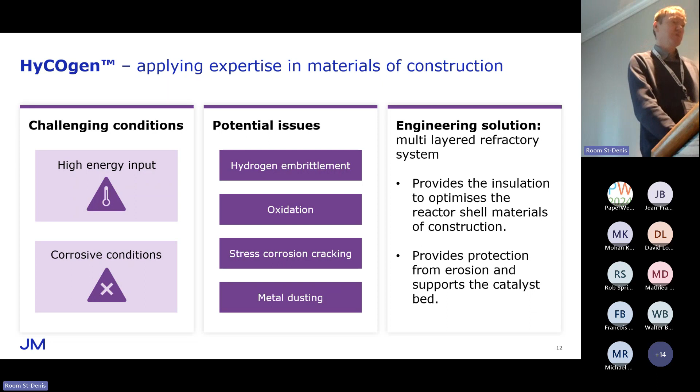So the FT cans is a development we've made with BP, the oil company, and this allows us to transform the syngas into hydrocarbon fuels.

The innovation here is the reactor design, and I'll show you that in a minute. This is a step change technology—by taking the carbon monoxide and the hydrogen, you can build up a chain, and this is a predictable route. You can build up certain chains. One key thing is keeping the temperature very controlled, otherwise you get different variations of reactions. This also reduces costs, increases productivity, and lets you start adding HyCOgen to help tailor the process. I'll show you more of that in a minute.

So this is what the can looks like. Imagine these cans are not much bigger than a Coca-Cola can. The gas—hydrogen and CO—comes in at the top, the blue lines. Then you get radial flow across where the catalyst is, and the gas goes down the outside of the can and is cooled. That's the key bit—you can control the temperature, because you really want very tight control. You want just a few degrees, which keeps the transfer very well and keeps control of it, since it's an exothermic reaction.

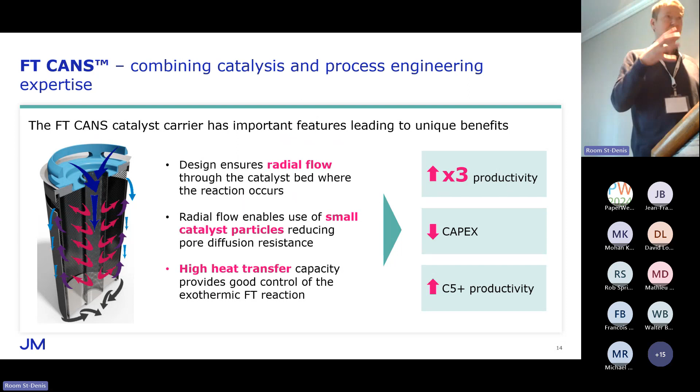So then you can get a 3x increase in productivity. You decrease your capex because these are small reactors, and you also get much higher productivity of the C5, which is the length of the chain you want, because you can manage to control that process.

This is an example of a license we've signed recently. Repsol in Spain and Saudi Aramco have a process for sustainable aviation fuel. They capture carbon dioxide from their plant and add renewable hydrogen created by wind. They use our HyCOgen technology to convert the CO2 into syngas, and then use the CANS reactor to make the synthetic crude. From that, you produce significant sustainable aviation fuel. Currently the plant in Bilbao is producing 2,100 tons of this a year—a good success story.

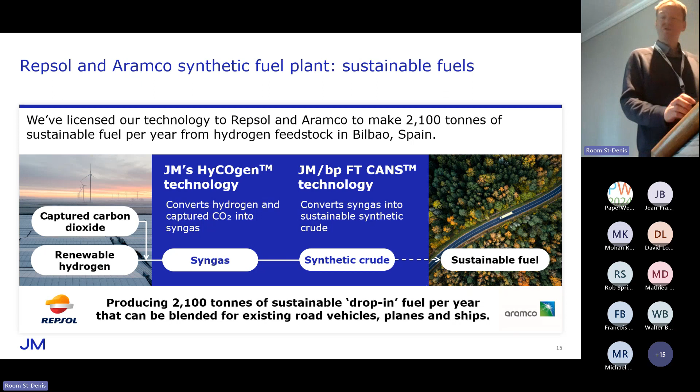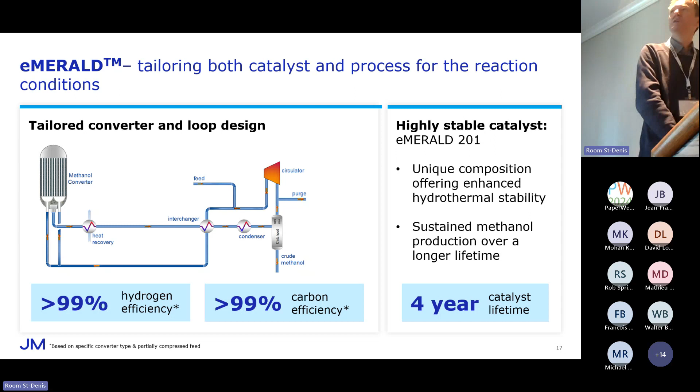This has proved to be a technology where we can also generate very high carbon efficiencies. There's a recycle loop here that helps control the temperature—in all these processes, temperature is the key thing, you need to keep it controlled. As I said, it's quite a hard, challenging environment, and all these new applications seem fairly challenging for the catalyst, but we've now managed to get a 4-year lifetime, which is acceptable—it's good.

An example of where this technology has been applied: the HIF Global Sustainable Aviation Fuel process, also with Honeywell. HIF Global are the leaders doing an engineering study on this. They've got recycled carbon dioxide and renewable hydrogen, which they put into the reactor to produce methanol, and then they use Honeywell's technology to produce the SAF fuel—another route to SAF. As we heard earlier, we're going to need different ways of doing this. No one solution will be the winner, but there will be a mixture of them, and this is a good one.

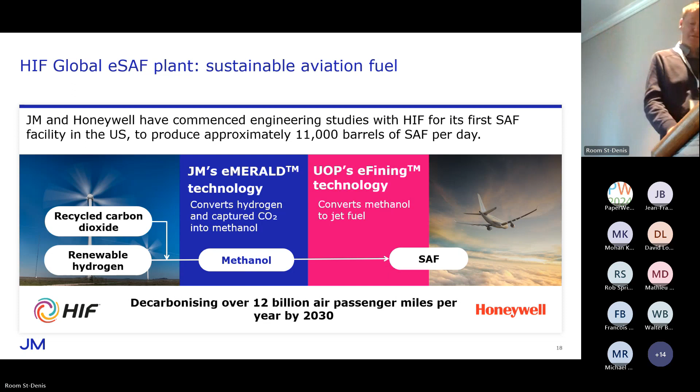So I've shown you some examples of commercial things—those are all near term. Going further forward, we need research as well. As a company, we team up with other research organizations and universities to leverage skills that we don't have and that other universities and companies do. I'll give you an example of two of them. We have the Prosperity Partnership, funded by the British government and sponsored by BP, with Cardiff and Manchester.

And this is another example of converting carbon dioxide, waste, and biomass into sustainable aviation and other sustainable fuels. The next one is called Flue2Chem, led by Unilever, with Procter & Gamble and lots of companies working together. I think this is the key point - none of these things can be done in isolation, you need lots of companies doing this. In this case, they're transforming waste carbon dioxide into surfactants, long chain value-added chemicals. This seems to be the thing - being able to take carbon dioxide and turn it into something of value.

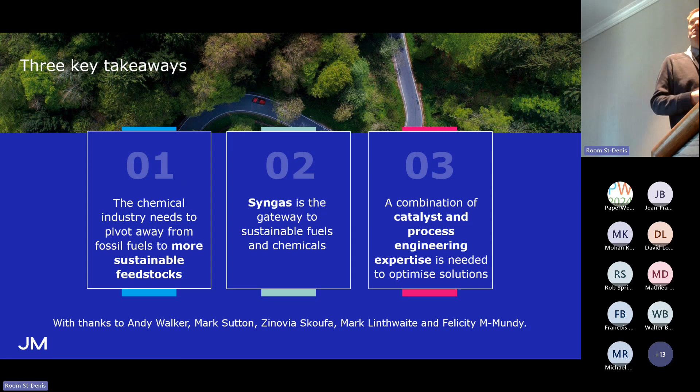So my three take-home messages from this talk are: the chemical industry needs to pivot away from fossil fuels and use more sustainable feedstock. Within FlexSNG, we've been looking at biomass, and increasingly we're looking at using waste because they're much cheaper, but that creates challenges for the catalyst. We talked about the tars and the sulfurs - we've either got to create catalysts which can cope with that, or we've got to have purification trains. But obviously this is all going to add cost. Ultimately, it's the way we have to go, so we have to develop these catalysts.

I've shown that syngas is a great gateway to sustainable chemicals and feedstocks. Obviously, we need to make more of them because the challenges are large. Once these first-of-a-kind plants are demonstrated, then we can produce more and they'll become very popular. It's a combination of catalyst and process engineering that's required in all these cases - it can't be just one or the other.

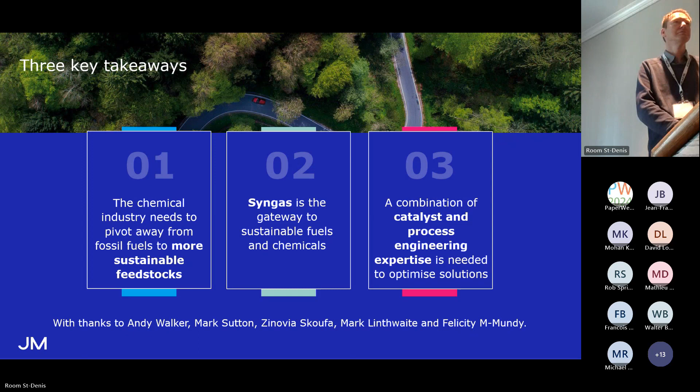Hello, hi, Panise Palvanlu, Natural Resources Canada. A question about using different biomass feedstocks - do you find that your different catalysts have different impurities in different feedstocks that are more of a challenge? How do you deal with that from a catalysis perspective?

Thanks. So traditionally, our catalysts in the traditional syngas route have very, very low tolerances to poisons - you normally talk about parts per billion, and they have a lifetime. But with these new challenges, we're going to need much higher tolerance levels. Some of these feedstocks have about 1% sulfur in them, really, really big. That's why as a company, we're very keen to demonstrate these, especially at pilot scale - it has to be done at pilot scale.

What we've been looking at is if you can get the temperature hot enough in the reactor, then a lot of these poisons just keep moving through the system, and that's really good. But what we need is time on stream, because it's very easy to demonstrate a catalyst works for one hour, ten hours in a lab, but actually working on a pilot scale for hundreds or thousands of hours a year is very challenging.

What we've been doing in FlexCheck is taking the catalysts afterwards, putting them in different parts of the bed, taking them out and analyzing and characterizing them to see where the chemicals are. So far the results have been good - we don't see any coking, which traditionally poisons these catalysts through carbon laydown. But I think because the temperature is so high and we've got hydrogen there, it seems to work. Sulfur tends to move through the systems, but we think chlorine might be a challenge, and also silicon. So yeah, it is a harsh environment.